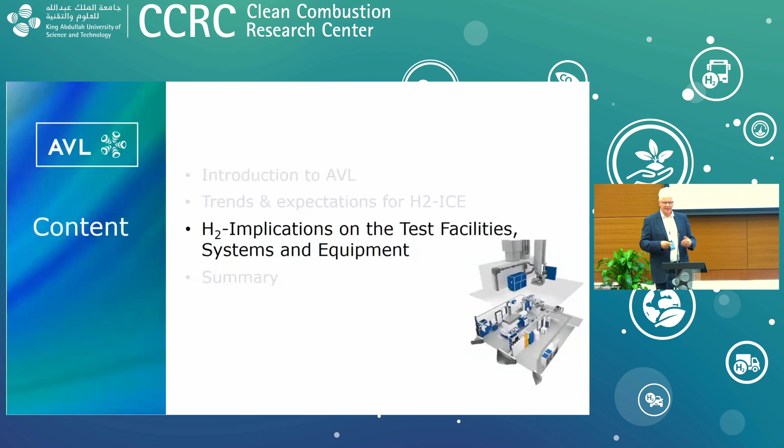We talked today a lot, and we heard a lot today about OEMs and a lot of activities in hydrogen combustion development. But development means also to validate and calibrate in the right environment. We as AVL are a global testbed supplier, and we are of course also requested to provide appropriate solutions for hydrogen engine testing. We want to share with you today a little insight into what are the relevant aspects to look at.

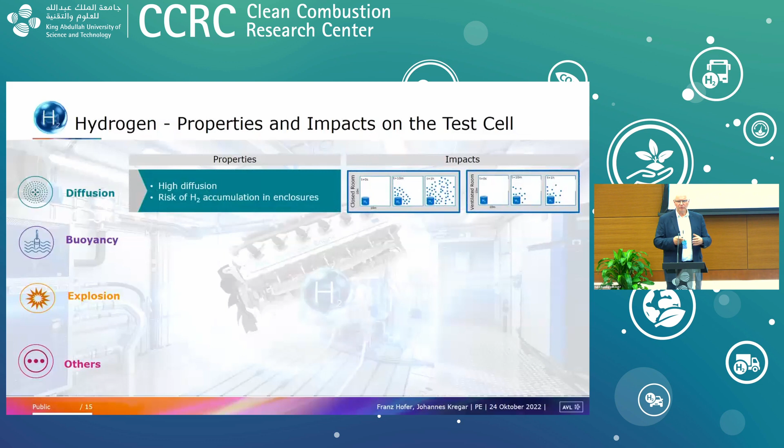When we have hydrogen, first a quick look at the properties and the impact to the test cell. We have a high diffusion. We have, of course, also in such a test cell, the risk for accumulation of hydrogen if it's not well ventilated. Hydrogen is rising up very quickly, because it's much lighter, significantly lighter than air. And we have, of course, the danger of explosion. That's the biggest point and the biggest fear everybody has. I have to avoid explosion.

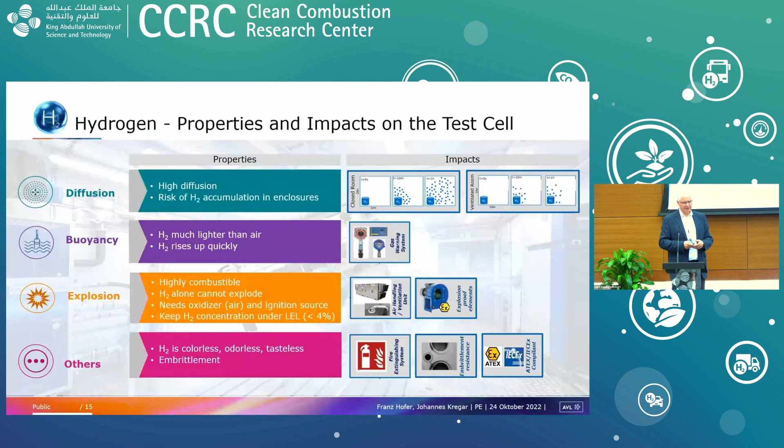But as we know, hydrogen alone cannot explode. We need an ignition source, and we need, of course, also oxidizer air. And finally, we have to look into aspects like embrittlement, so material which is also of course affected by hydrogen. But that's just a little introduction to hydrogen and the relevant points we see necessary to look at.

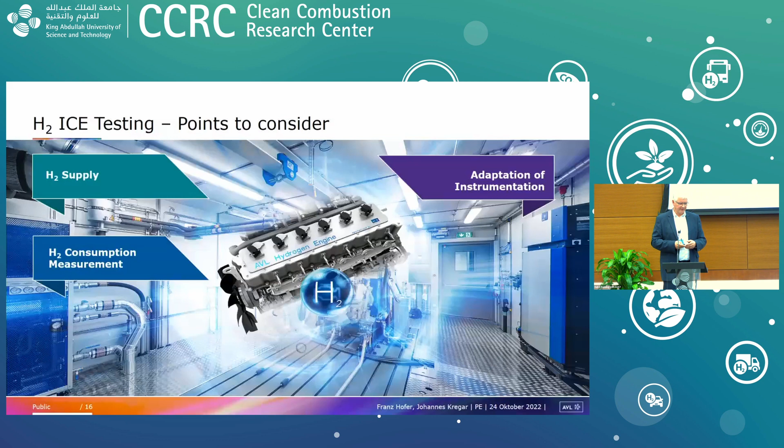From a holistic point of view, on the test facility, it's a lot what we have around our test engine. But first, we have to think about the hydrogen supply - the external supply, the hydrogen storage, and the supply to the test rig. In the test cell, of course, we are also expecting a very accurate, very repeatable hydrogen consumption measurement for these specific engine technologies. And not to forget, we have a lot of instrumentation, and we see an impact of the hydrogen combustion into this instrumentation to look at.

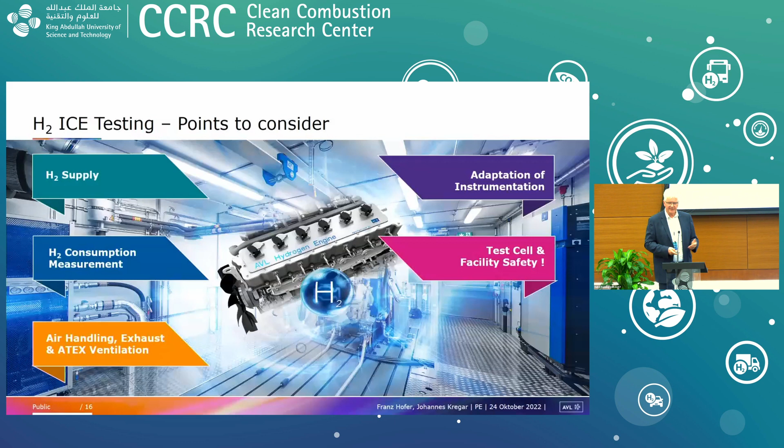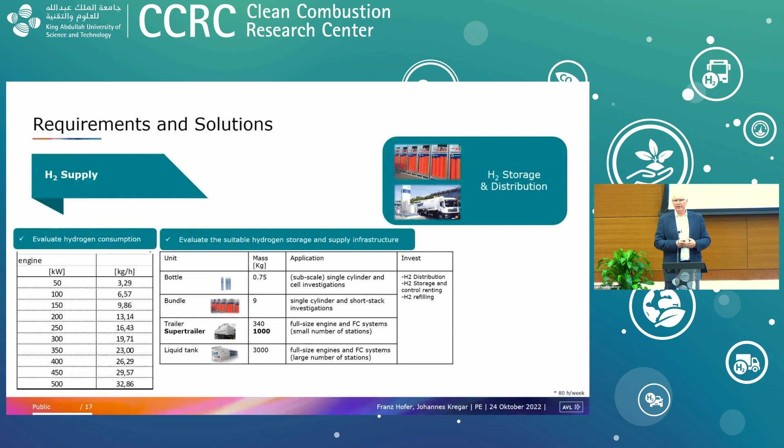Overall, we have to look into the test cell, the test facility, and the safety aspects of such a test facility. Let's go step by step through this. Hydrogen supply and storage - of course, when knowing the consumption, the average consumption of my workload of the facility, then I can think about what is the right storage. Is it a bottle? Is it a bundle? Is it a trailer? Is it a super trailer? Or is it maybe also a liquid tank? But that's an easy calculation. You will see this in the handout, because by just looking at the logistic limits, it's very easy to decide what is the best choice for my test facility operation.

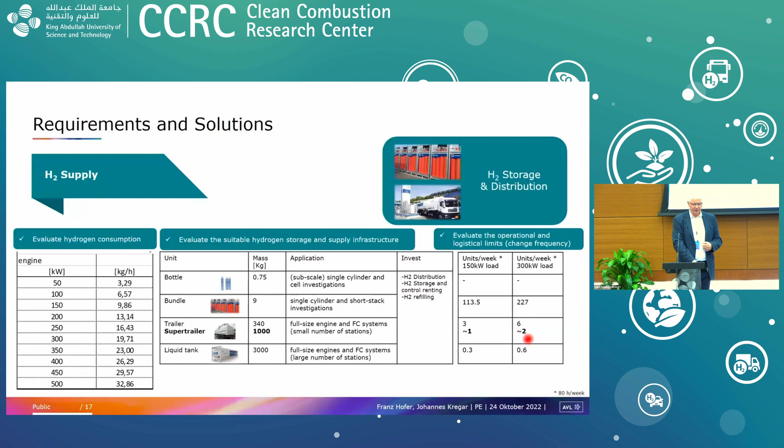So looking at one example here, if I have, for example, a 300 kilowatt permanent workload over, let's say, 80 hours a week, I need to replace, for example, a bundle 227 times. Impossible, of course. So the only option is to look into a trailer where we have different technologies, but you see this is quite challenging. So very soon we are towards liquefied tanks, or also electrolyzers to be installed at site. These are options typically done always with local experts, local suppliers, but it's the relevant starting point.

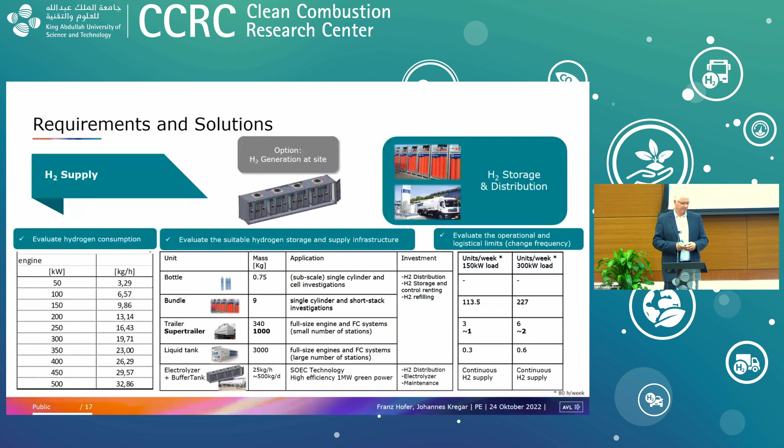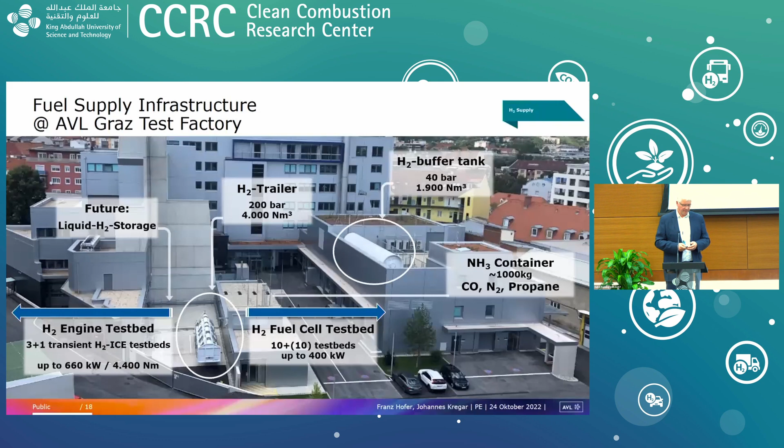Next point, hydrogen consumption measurement. Consumption measurement looks or sounds very easy at first look. But what is the expectation, of course, from an engineer on a testbed? The first point is, of course, it's expected to comply with combustion injection concepts. And what is behind here? Of course, we need to provide a very stable supply pressure, flow supply to the engine.

This is in concepts what we are supporting nowadays with port fuel injection or with low pressure DI. You see here the pressure levels - it's very difficult, the pressure levels here are rather low. But today test facilities, when they are modernized, they are thinking about 10 years, 15 years ahead. So they talk about high pressure direct injection, where we have heard today that's a dream. But the point is, the test facility should be prepared to manage these high pressures.

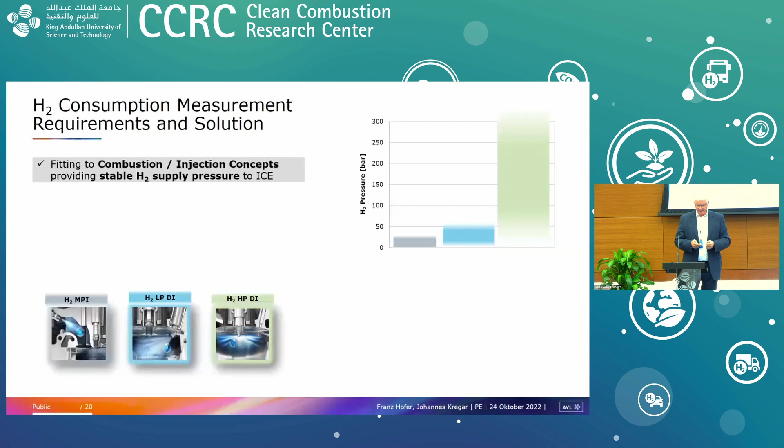And these high pressures means not 50, 60 bar, it means 200 bar and higher. And that's, of course, a very important thing. Let's say it triggers necessary things on the safety side.

We expect, as I said before, continuous pressure supply, and this, of course, also offers good accuracy and good repeatability of the measurements, which is always the boundary condition of every engine development, to have excellent repeatability of the test results.

And such a system is not just a flow meter. Such a system is an integrated total system, which also provides check functions, automatic routines for purging or inertization. So it's, I wouldn't say plug and play, but it's a very industrialized, ready to use subsystem to be installed in such a test facility.

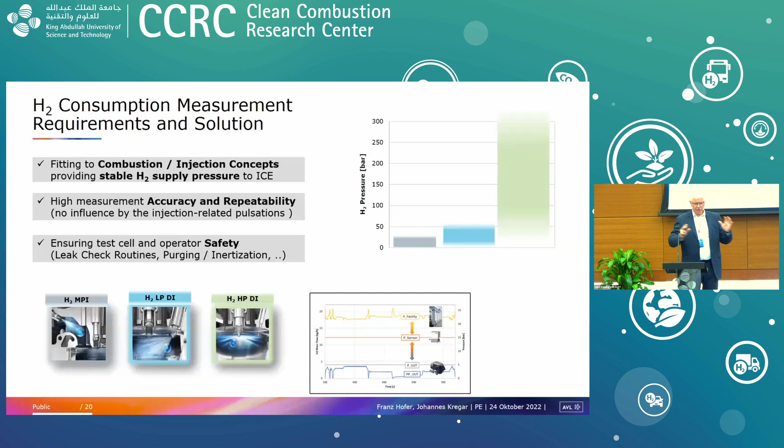We call this HyTron, very nice name, and we have this in different models, as you can see here.

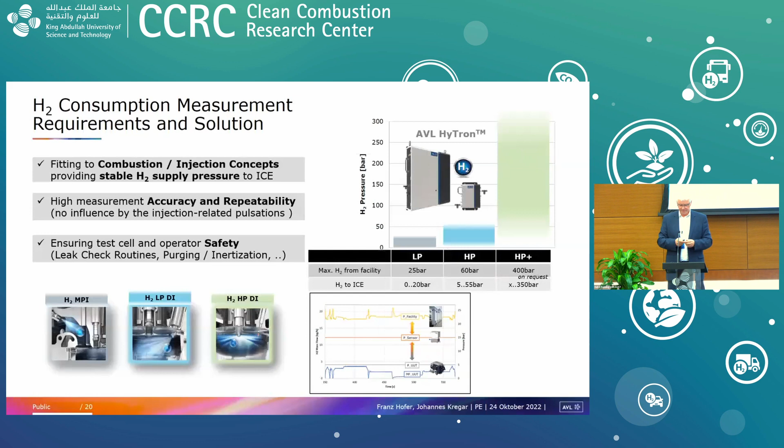Next point, instrumentation. Of course, fuel consumption is also instrumentation, but a very specific one. But we have a lot of instruments, a lot of measuring systems on the test bed, which needs to be carefully checked. The simplest one is, of course, the air side.

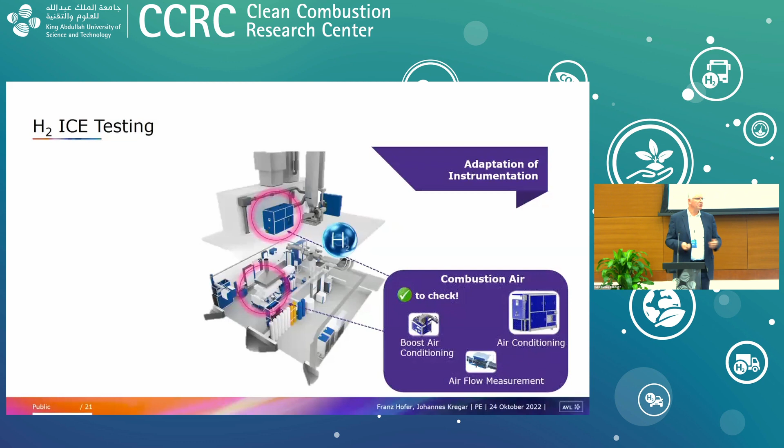We know we have a higher air-fuel ratio. We also run with higher lambda. So that means the air mass flow to the engine is significantly higher. This needs to be checked with the existing equipment, straightforward.

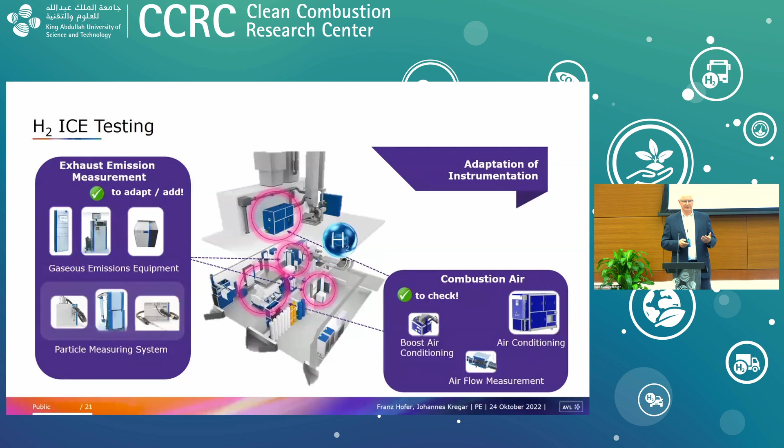But when we have hydrogen, when we are burning hydrogen, we have also a lot of challenges on the emission side, where we also heard today, it is mainly NOx. On the emission side, it's mainly a little bit on the particulate number, but the instruments have to deal with that. And they have to deal with a significant amount of water.

What it means for gaseous emissions, but also for particulate instrumentation. So gaseous emissions, we have a cooler, we have cross sensitivities, we have quenching effects, and we have also, of course, our multi-component measurement, FTIR, where we have to look to the evaluation software. The instruments need to be prepared for that.

We are proud to have here already developments in which we are providing to the industry already starting from this year.

Another point is that with these devices, what can happen? I mean, we have combustion anomalies. That means we have misfiring. We have a lot of this stuff, means the instruments will be exposed to hydrogen. So we have to make a risk assessment if these instruments can still be used without a problem.

And I think this is very important for every owner of a facility to think about this point. So it means countermeasures in the safety, overall safety chain, safety functions need to be considered.

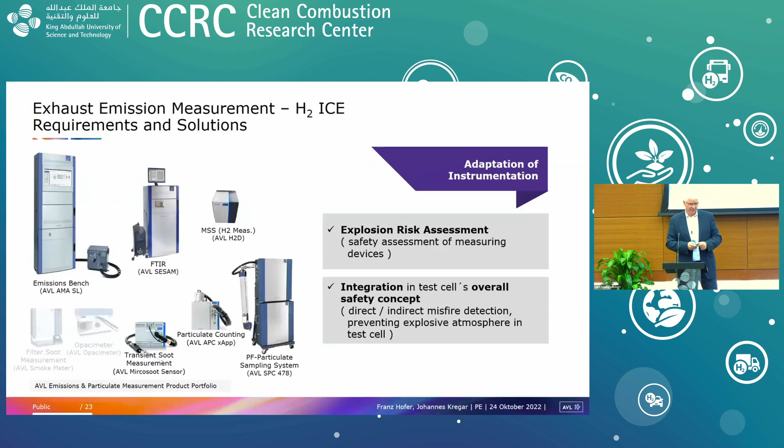And as I said already, this needs to be integrated in the overall safety concept, by means of how to detect misfiring and how to react on that, but how to control then or shut off emission measuring devices and things like that.

And we have a hydrogen slip, which is a new component, which needs to be measured, and which is, of course, best possible to be combined from an instrumentation point of view with an FTIR as an additional device.

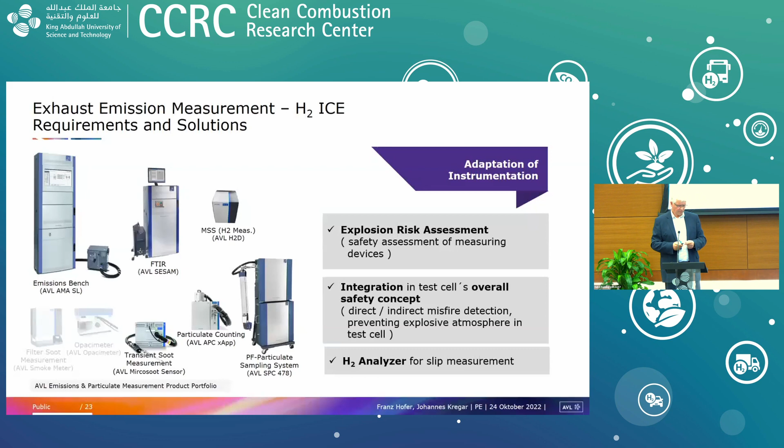Combustion analysis, I think a lot has been discussed already and spoken. Here, just to mention that, of course, AVL is known as a company which had a strong focus on combustion engines from the very beginning. So that means combustion analysis technology was and is our daily business.

And what we can say is our indicating systems are also ready for that. So we can also provide you here whatever you have, maybe from AVL, we can also provide the updates necessary for the hydrogen application.

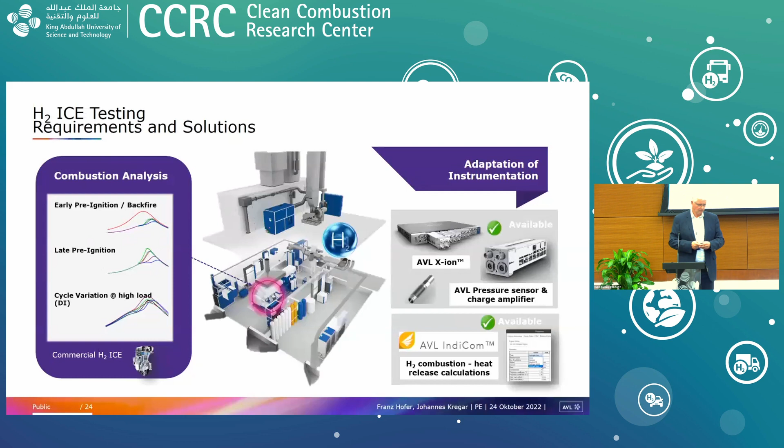Not mentioned today, but maybe in 2 words, blow-by could become critical because, as we have heard, there was one statement talking about optimizing the cylinder liner displacement by looking at friction, and then, of course, minimizing here maybe the blow-by, but it's also the question how to manage the hydrogen in the blow-by. And this could be of a very dominant portion, which is then, of course, a risk for the engine to explode, but also a risk for the instrumentation to create problems.

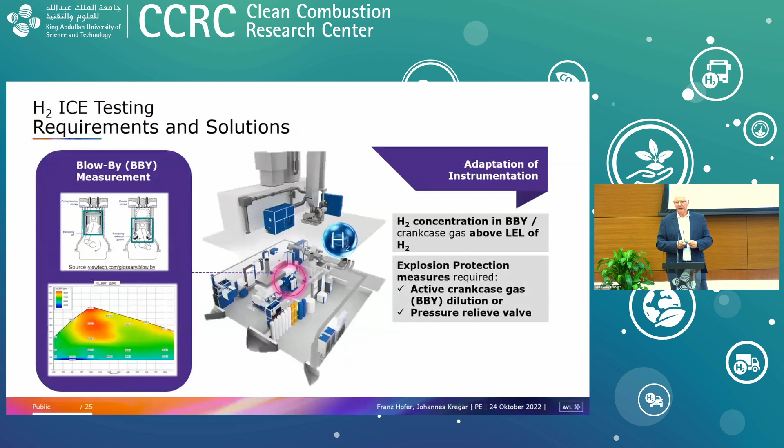Because the instrumentation is basically not explosion proof. So that means protection measures, some mitigation measures are necessary, either on the engine itself, like concepts that are currently discussed on crankcase dilution, active dilution, or in bigger engines, we have this pressure relief valve, which of course is the mitigation measure when being tested on the test bed and in final use.

And we have a hydrogen sensor we can install in the line. And in our case, we are coming up soon with an even hydrogen proof, explosion proof blow-by version for such customers who are not sure what is the status of the maturity level of their crankcase ventilation system.

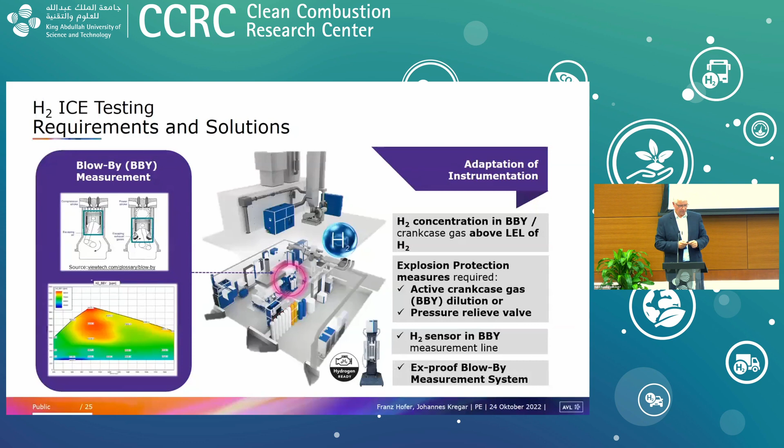To be quick, all that together, of course, needs to be combined with the necessary measures on the facility system and the facility safety concept.

Explosion risk - what I did not say is what is mainly triggering the danger of hydrogen in the test cell is the pressure. The higher the pressure release, the possible release into the test cell, the higher the demand, of course, to dilute it with a suitable cell ventilation.

All this has to become part of the overall safety concept, which needs to be engineered and aligned with local regulators and local authorities to get at the end the final check to say, fine, we can go with that.

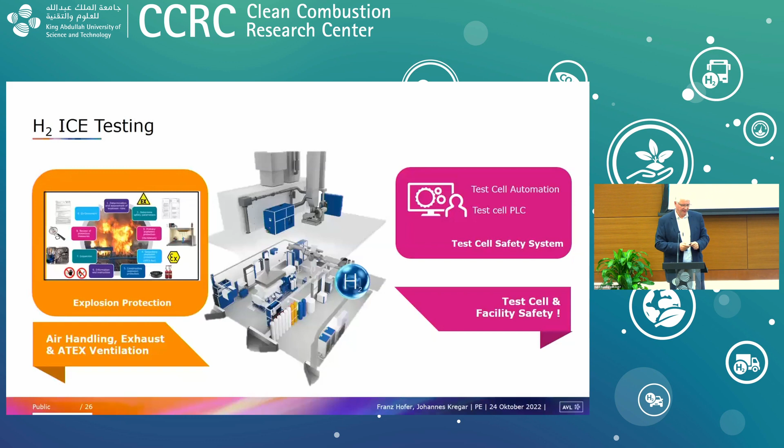I will jump over - I was already explaining this, what's behind it.

Whatever the safety assessment is concerned, we can also here accompany the customer and go up to a certain stage and define the necessary mitigation measures for the whole facility from a holistic point of view.

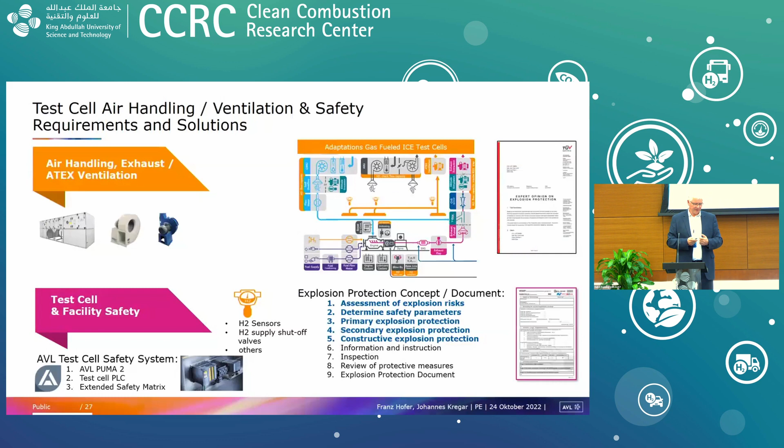First of all, when we go to a hydrogen engine on the test bed, we have to look to the hydrogen supply and the suitable hydrogen consumption measurement. In our case, it's called Hydron.

Then we have to look carefully at the emissions equipment, what is in place, what is in use, to manage this significantly higher water content and to avoid measurement errors.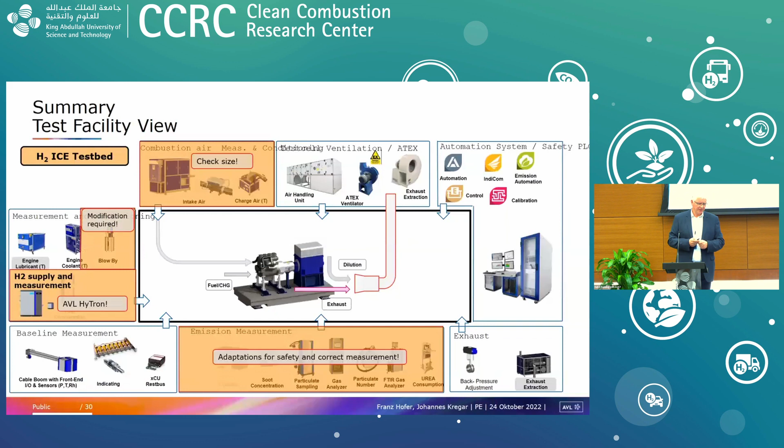Blow-by, we already mentioned, is also a point which needs to be carefully looked at.

Then, okay, simple stuff like simple pressure transducers around the engine, but also specifically the combustion analysis items, cell ventilation, and the overall test cell safety concept.

What do we see here? It's a big portion of the test cell which needs to be looked at. Very often I get the answer, it's just a sensor to be put somewhere in the ceiling. That's the opposite of the answer.

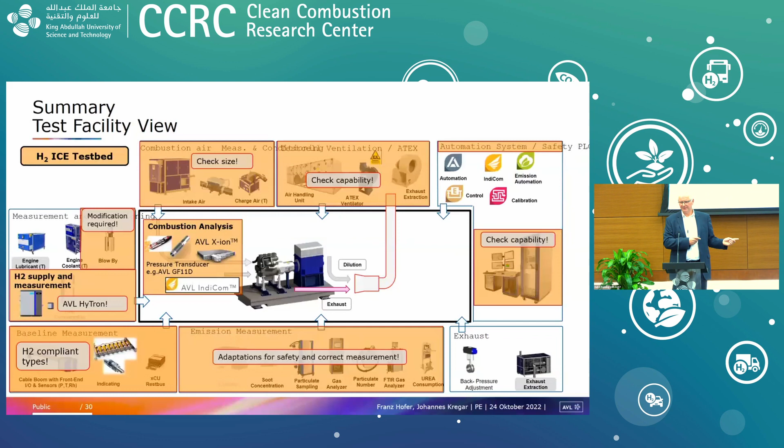With that, thank you very much for your attention.